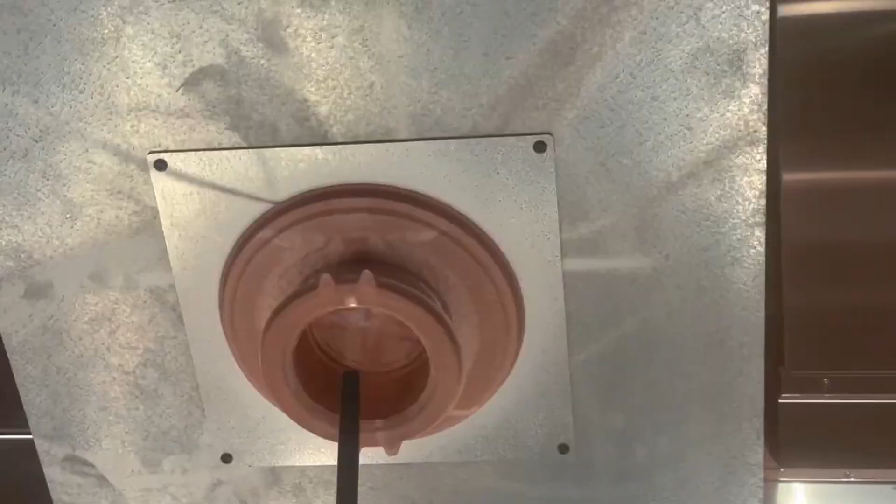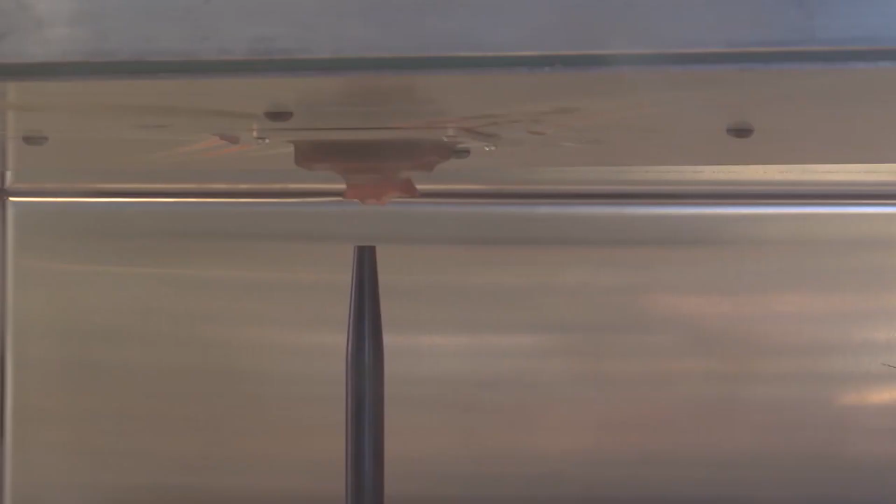I'm Lieutenant Colonel Kane Wright, Commanding Officer of the 1st Combat Service Support Battalion. Over the last few months, the Australian Army have been conducting the world's first field trials of a WarpSPEE3D metal printer. Earlier this year, the Australian Army announced a $1.5 million investment into a 12-month pilot of SPEE3D technology. The program includes the training of soldiers in 3D printing and the trial of SPEE3D's large format WarpSPEE3D metal printer. The trial is designed to test the feasibility of deploying SPEE3D metal printers both on base and in the field. WarpSPEE3D uses patented cold spray technology that enables significantly faster and more cost-effective metal part production.

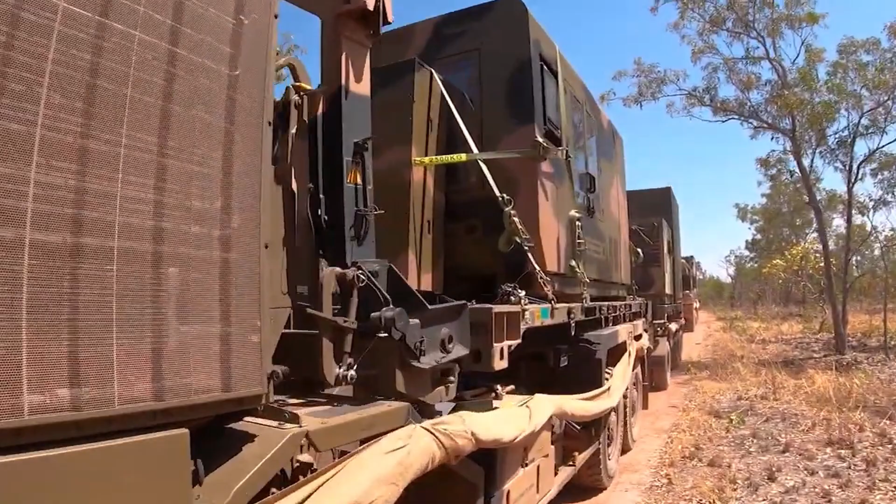Developed in Australia, the printer is capable of printing large metal parts up to 40 kilograms at 100 grams per minute. The trial has proven the printer and auxiliary container can be easily transported on the back of HX77 trucks. This 2-week training exercise at Mount Bundy is the second in a series of exercises in which we are putting the WarpSPEE3D through rigorous field testing, for example, loading and unloading in various terrains, emergency stops and redeployments, and general operation in austere environments.

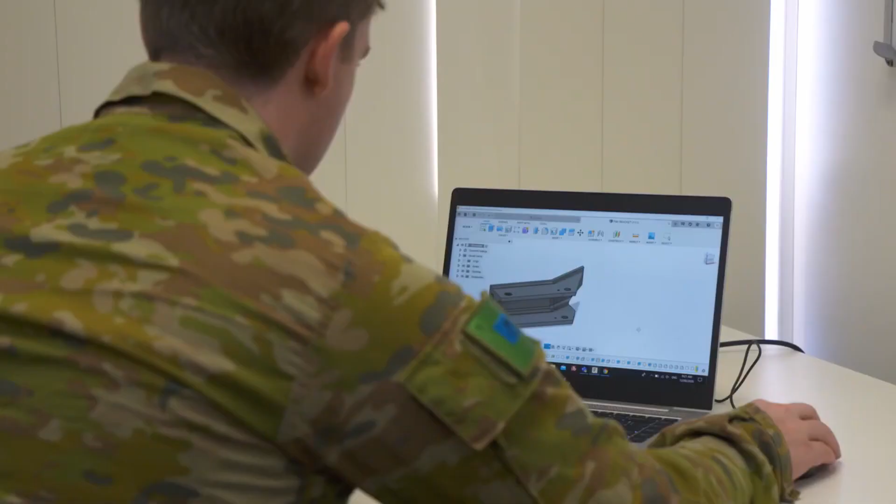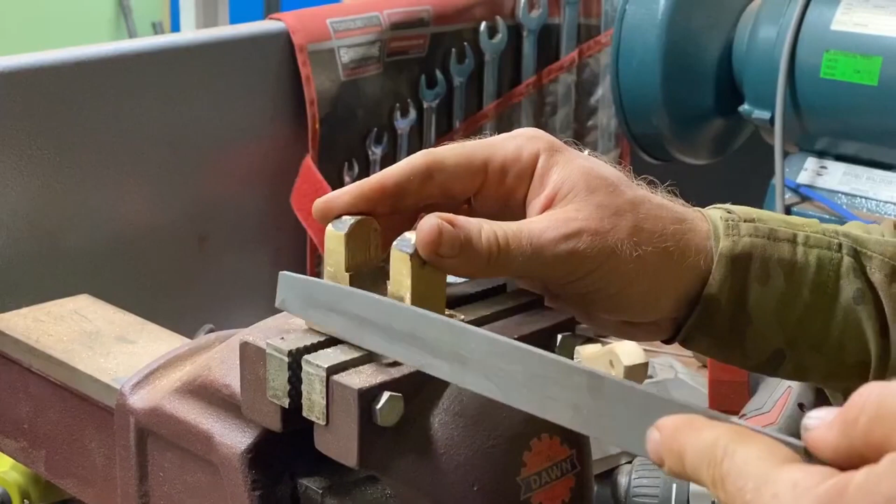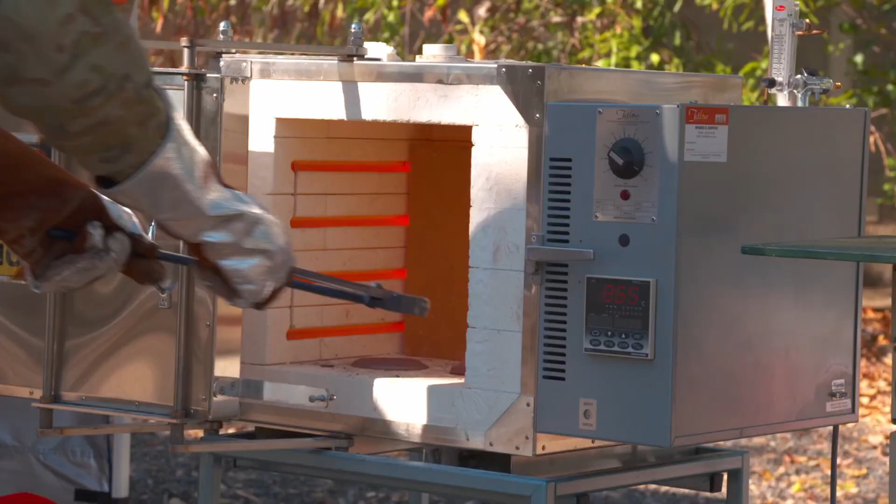Soldiers have been training at Charles Darwin University for over 6 months now, learning everything from design to certification of 3D printed parts. They have produced over 50 case studies of parts that can be replaced in the field with metal 3D printing. As an example, here is one of the parts produced today, a bulk fuel module mounting bracket which enables safe operation of manual fuel pumping. This part was designed by one of our trained soldiers and is able to be printed, heat treated, machined, tested and put to use here in the field. The ability to print repair parts in a deployed environment will significantly reduce our footprint and repair damaged equipment on the spot to get us back to our main priority.

Fantastic. Okay, so that video gives you a flavour of what the SPEE3D and Australian Army trial was all about. Actually, in the first 6 months, using cold spray, we as an army were able to demonstrate that the technology exists to allow soldiers, and therefore, if you wanted, seamen or airmen, military members, to take the latest manufacturing techniques out into the field and use it to make real worthwhile parts.

And this is what defense forces around the world are looking for. And specifically, having been there and been in that environment, we need a capability that is deployable. Now, the topic for this part of the conference is cold spray at the point of need. And I was asking myself, what is the point of need in Army? Where specifically is it?

Now, there is no one location. Armies will always say they want to repair and maintain equipment as far forward as possible, to keep that piece of equipment in the hand of the user so the fight can go forward. The same is true at sea as it is in the Air Force.

And so some photos here to demonstrate the different environments in which we took our cold spray technology. So if you look at the top left, that's either day 1 or day 2 of the Australian Army having a cold spray technology in its workshop. And that is a big industrial warehouse, lots of tradesmen from draftsmen, fitters, turners, electricians, vehicle mechanics, all working under that sort of environment on a day-to-day basis in their barracks.

And if you are in Army, you would call this second line support. Okay, it's within the brigade environment. You wouldn't take this sort of technology any farther forward than this point because frankly, it's too big, bulky and not maneuverable. This is absolutely the limit of where you can take a manufacturing capability. And it's actually very testing to get it that far forward because whilst the top left there shows you a warehouse, second line support exists in the field as well.

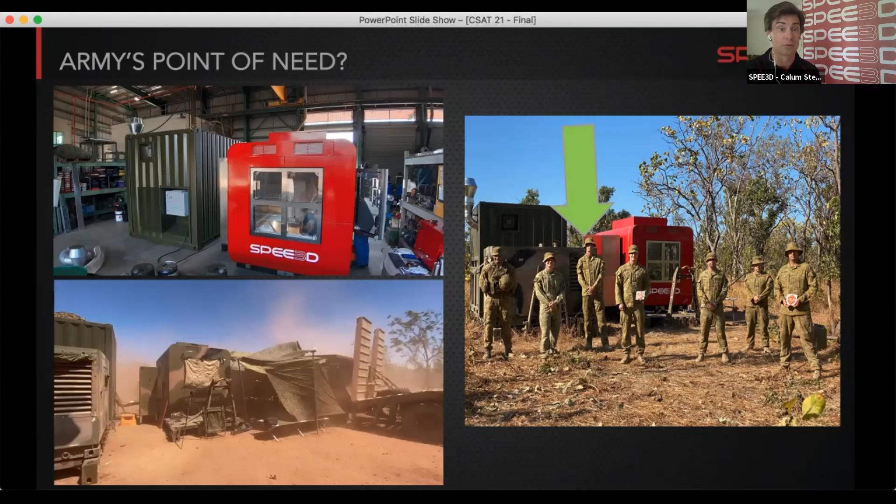And this is a brand new bit of kit. Now, with every bit of brand new kit, there are always points of failure, and that's to be expected. So there's no finger pointing here. But one of the parts on this vehicle that we knew consistently failed was this, a mounting bracket. Simple mounting bracket, nothing difficult to it. But that part allowed you to prime the pump, and it was shearing. It's actually made of two parts. It's a swivel. You can only see one part at the moment on the slide. But they don't exist in the supply chain.

Now, if this was Afghanistan, do you say we need to fly this part from around the world into Afghanistan? Or worse still, do you go to your supplier and find out that it isn't in the supply chain and that you need to wait for the part, then to fly it out? Or do you say we have our own manufacturing capability, but it's in America or it's in the UK or it's in Australia, it's not in the theatre where we need it, and say to that manufacturing organization out of theatre, we need you to make a bulk fuel module bracket for us.

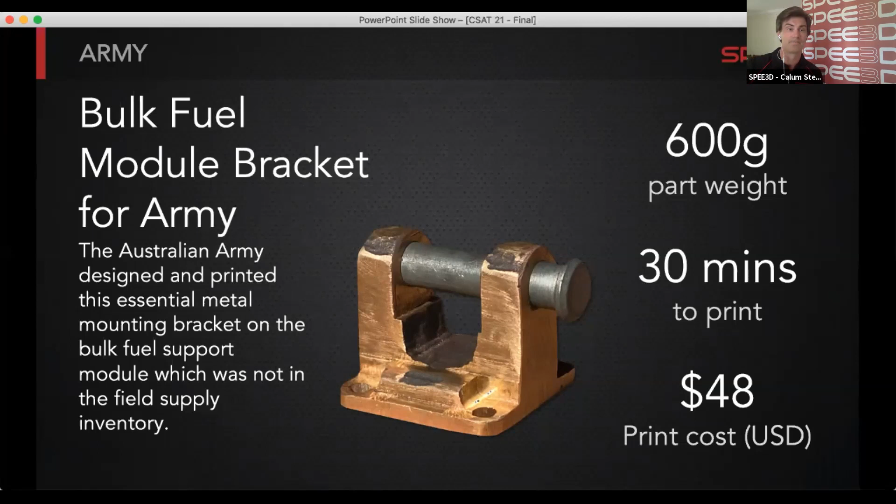And it's a classic example of what's the cost of not having this part versus what's the cost of the part. We get asked continually, well, is it not cheaper just to go source it and fly it in? Yeah, but when do you need that part? And what's the cost of not having it in time? But these are all arguments which in our industry, we all understand. There's a part actually being fitted to the subcomponent of the vehicle.

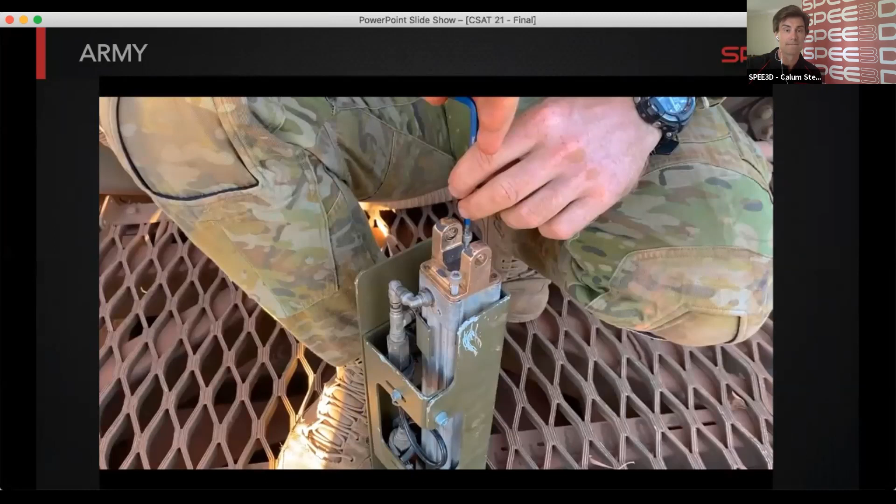Next part, I'm going to move quickly because I realize we've only got 30 minutes for the whole segment, and Vic probably wants to chat.

SPEE3D had it as one of the case studies within the trial, and you can see the results there for yourself, just how quickly and how easily it was for us to provide capability using our technology. And again, where do you do it? You make sure you're doing it in theatre as far forward as is practicably possible.

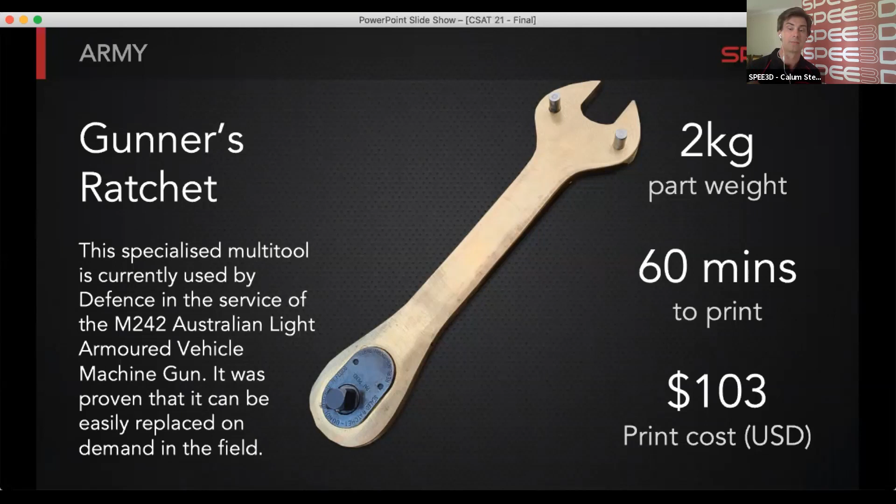Final piece, the Australian Army have a particularly old fleet of landing craft. So we're talking beach landing craft vessels. And no surprise that when it comes to pump housings, particularly I think if the original is made of aluminium, it's going to corrode, it's going to fail, it's going to break. And we are talking Vietnam era technology or Vietnam era vessels.

And these fail regularly. And it was one of the more complicated pieces that the soldiers had to redesign and print. But again, where would you be doing it? You would be doing it in theatre as far forward as possible.

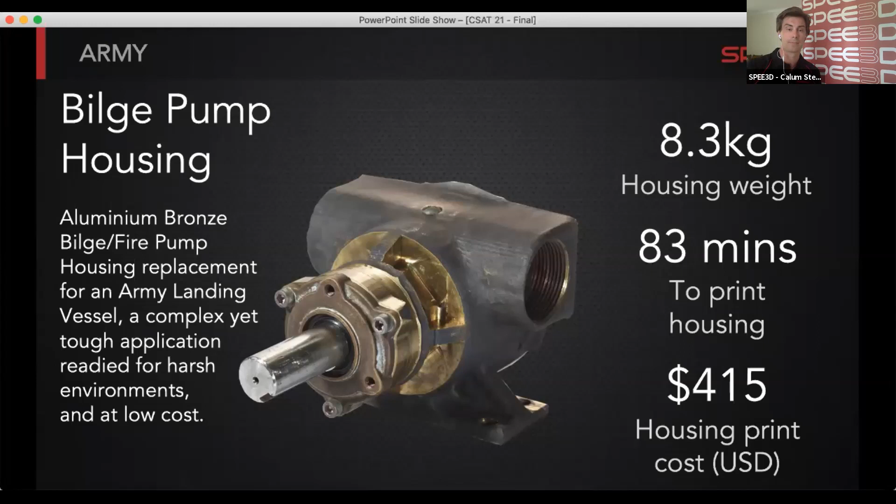So what's next for cold spray as we see it here in SPEE3D? We are having fantastic success with the Australian Army. We're going gangbusters. And we are in discussions with other defence forces around the world and defence primes. And the conversation is always about use cases. Am I going to be able to make use of this capability, of this technology?

This example here, Titan, is the British Army bridge layer. Tanks can't go anywhere if they cannot cross large gaps. Tanks are useless at crossing large gaps, so you need a bridge. And as you can see there, Titan carries a bridge on its shoulders and drops it over the gap. Titan came into service in 2006 and it has 1,400 components that are no longer available in the supply chain. This is where cold spray gets into its defence market.

I've gone back and I've watched some of the presentations from the previous workshops, in particular, Dr. Champagne's presentations at the start of each year. I see his timeline of what's happening with cold spray and what he expected to happen over 10, 15 years. And the final stage being near net parts. We are absolutely at this point with cold spray.

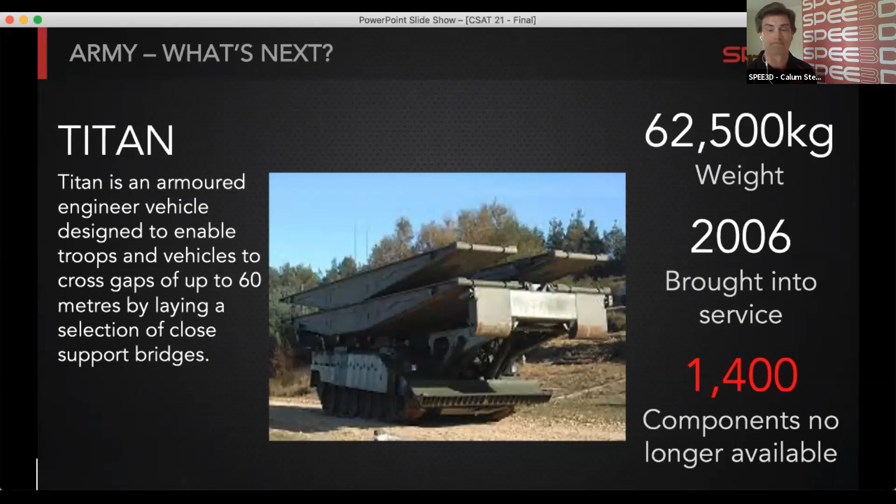So long as you can deploy it, so long as you can get it into the theatre of use, you have a market for cold spray because the parts that are being made are to the standard required. And that standard I always coin in defence is good enough. The standard is: is it good enough for the job? I'm going to wrap up quickly because I've been going on for 18 minutes.

Point of need, as far forward as possible in the theatre, so the customer can engage with the manufacturing facility. Your technology needs to be soldier proof. It's soldiers, seamen and airmen that are going to be using it. And therefore it's got to be modern, it's got to be engaging, and it's got to be robust. When engaging with defence forces, provide a blunt bottom line up front. This is rapid manufacturing. It is not 3D printing.

Down the bottom there, this is something, as the customer in Army, I got frustrated with immediately. Is this 3D printing or is it not? 3D printing, in my mind, I thought it was Star Trek stuff, replicator stuff. We all know that's not the case. It's rapid manufacturing. It's part of a process that defence forces want to be able to provide sovereign capability to manufacture. This is a great addition, but it is not a Star Trek replicator. Tell your customers this in advance.

And the second to last one there, the quality standard for defence will always be good enough. It does not need to be to that of the original. It needs to be good enough for them to use it in the mission over a period of time that is defined by the commanding officer or commander who holds the risk. The supply chain will always hold primacy. Cold spray finds its niche in supporting and adding rigour to that supply chain.